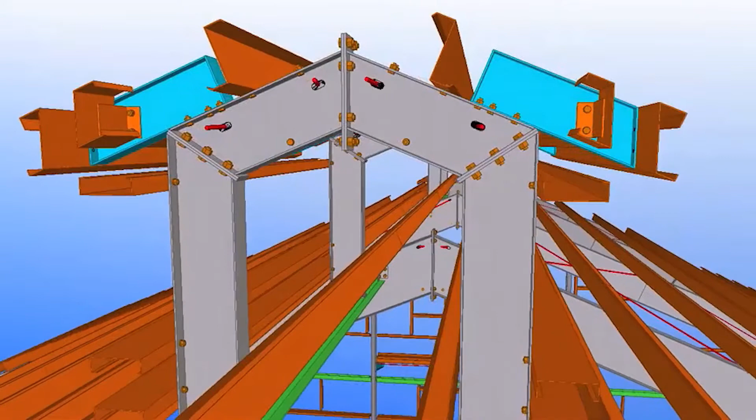All project data is accessed from the cloud, and the app uses technology that is already available on today's smart devices. Tekla 3D Building Information Modeling, or BIM, comes standard. All of this is possible because of our significant investment in BIM.

This investment helps move us into the digital age where stacks of paper drawings and 2D plans cluttering your desk are a thing of the past. Now your fully realized project fits right in the palm of your hand.

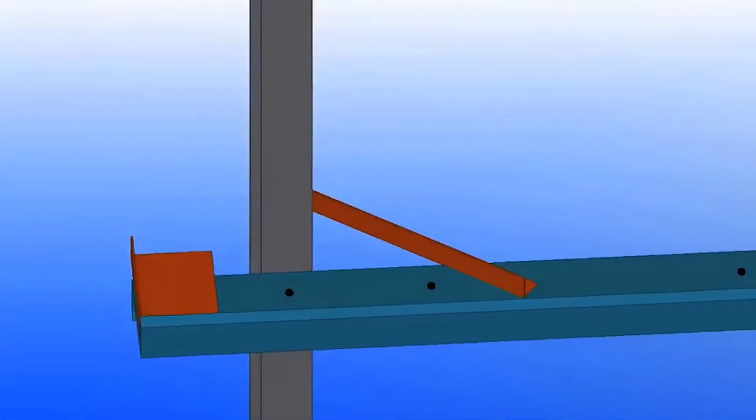This unique app was specifically developed to help builders and erectors save time unloading and staging steel at the job site. But perhaps the most important benefit of this revolutionary app is the enhanced efficiency of the shakeout and laydown process.

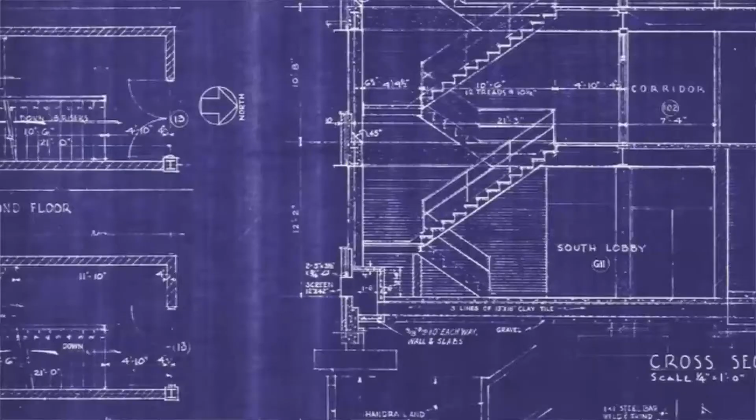Before ShakeoutPro, steel stagers would have to manually search through stacks of papers and drawings for the part marks they needed, then visualize which portion of the job site that drawing refers to before knowing where to move each piece of steel. And then they repeated that entire process for every single part mark. It was a lot of work.

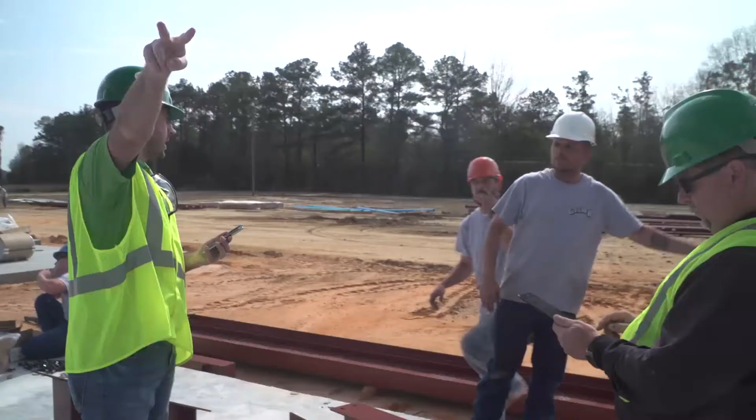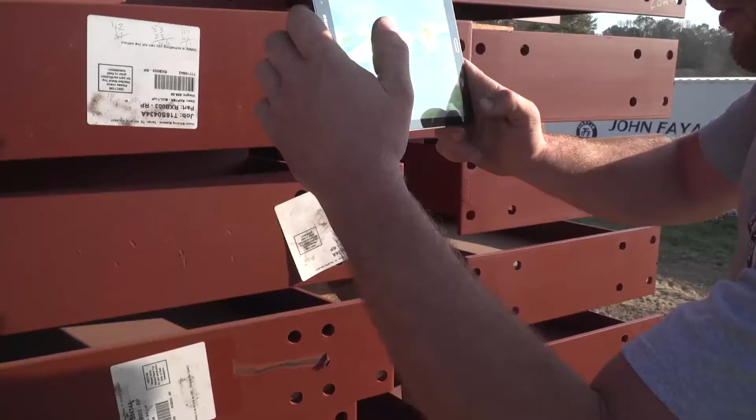As mentioned earlier, ShakeoutPro requires no special equipment or software. Just download the app to a smartphone or tablet that has a camera and an internet connection. Then, by simply scanning the barcode on any part, bundle, or crate, the app will digitally identify the appropriate parts and highlight them within the 3D model.

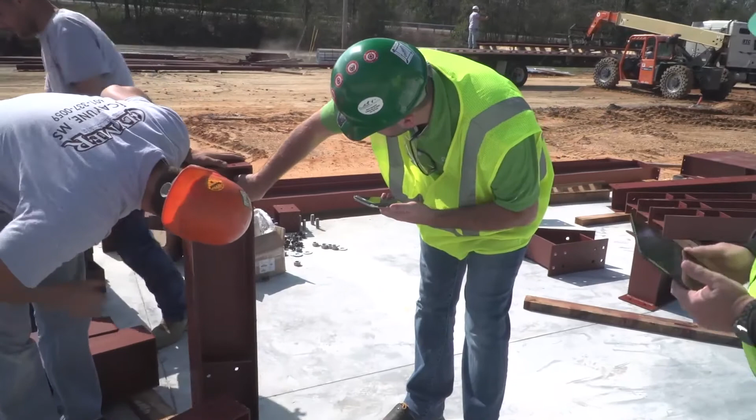It's not magic, it's the future of construction. And it's easy to use. When we introduced the app on test projects, field personnel were able to understand how to use ShakeoutPro in just a matter of minutes. In fact, many of the field workers who were familiar with even the traditional 2D method picked up a tablet and immediately began to move steel to the appropriate locations on the site.

To get started, just download the app to your iOS or Android device, type in the project number supplied by customer service, then tap the green Load My Project button on your screen. It's as simple as that.

ShakeoutPro controls at a glance. ShakeoutPro has an extensive set of features and controls that allow you to quickly shake out and stage with ease. And the intuitive design makes it remarkably easy to operate. Now let's take a closer look at these time-saving functions.

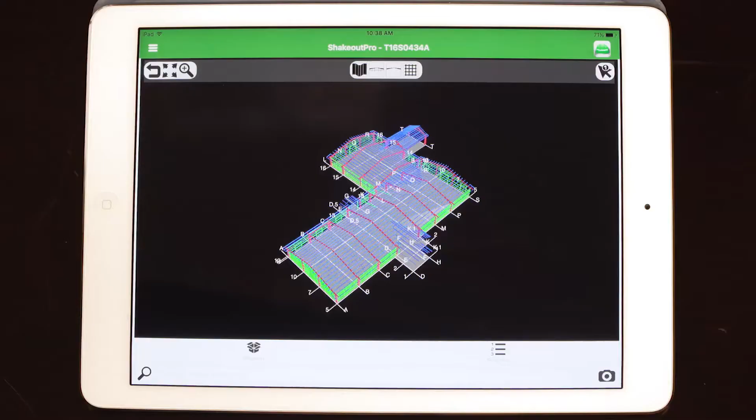Model View Gestures. You can change the way you view the model with a variety of simple finger movements. When a project loads, you are taken to the Model View screen from which you can view and navigate your project. With a single finger, you can pan left to right and vice versa.

With a two-finger slide, you can rotate the model view around the center of the screen. By using two fingers in a pinch or push motion, you can either zoom in or zoom out from the center of the screen.

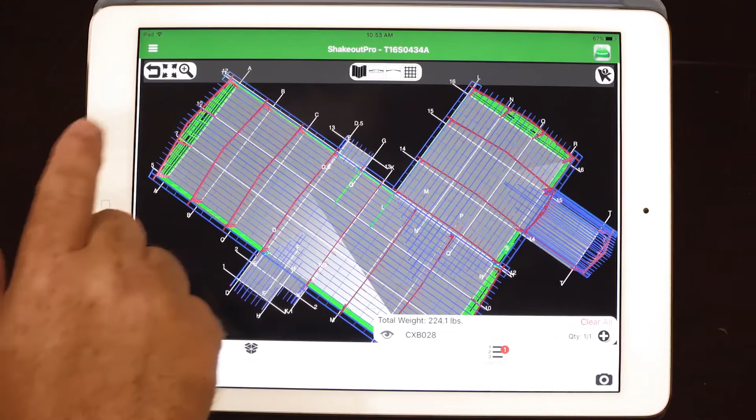View controls. View the model from the vantage point you want by simply tapping the appropriate icons. Want to go back to the original configuration? Just tap to return to the default zoom level and view angle. Tap to zoom out far enough to view the entire model, maintaining whichever angle you currently have. Tap to zoom in or out so that any selected part or parts will fit within the model view.

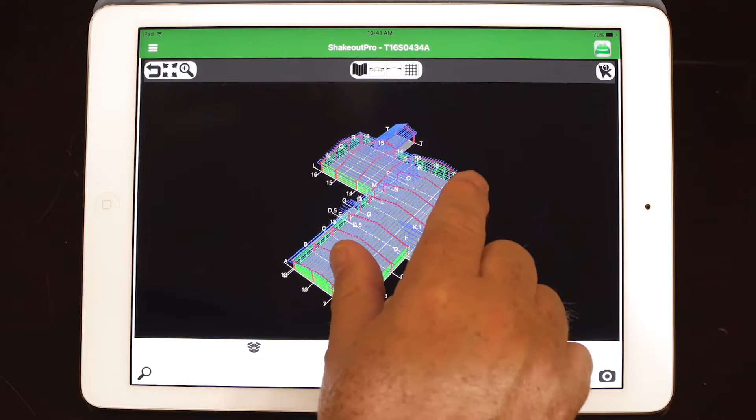Building grid lines. Quickly and easily determine where your parts need to be placed thanks to the building grid lines. Building grid lines are displayed as an overlay with the 3D building model, providing a method of orientation and direction on screen, just as they do on paper. These grid lines allow you to quickly orient yourself with the building layout and more easily identify where your parts need to be placed.

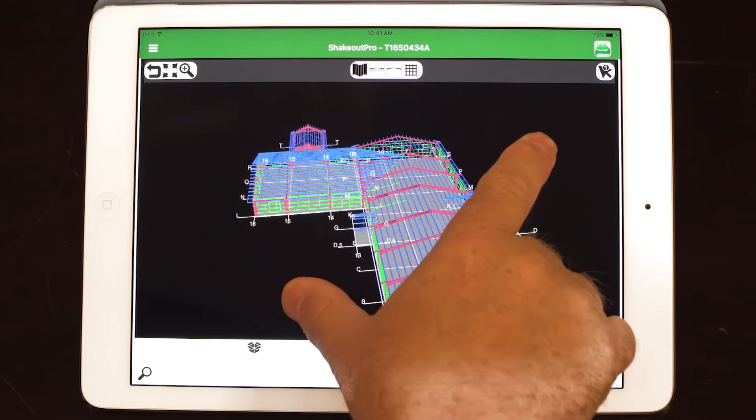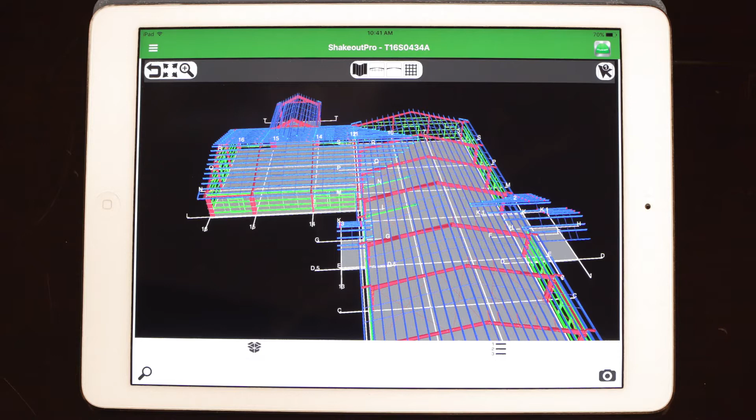When you scan a barcode on the physical column, it highlights the part so that you can see where it belongs on screen. But now you need to relay this location to your team. The grid lines allow you to call out a specific yet commonly understood location to your team. You'll be able to enjoy the benefits of this new age innovation while using the same language and terminology your team uses today. Grid lines can be turned on or off by simply tapping the grid line icon.

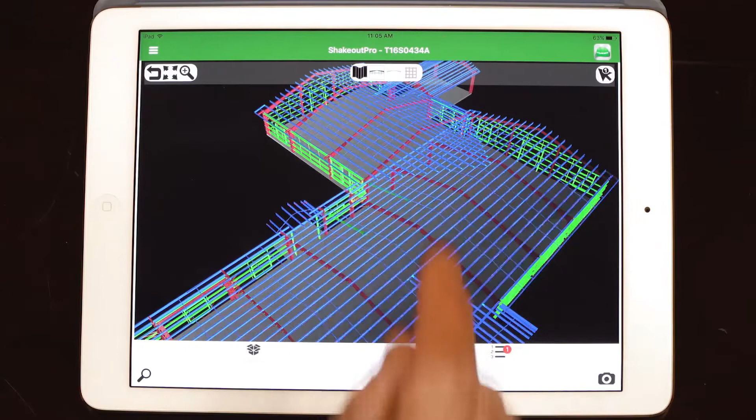Layer visibility controls. ShakeoutPro lets you control which layers you see. Just tap here to enable or disable visibility for all sheeting members in the model view. Tap to enable or disable visibility for all primary framing members in the model view. Tap to enable or disable visibility for all secondary framing members in the model view.

In selection mode, you can decide whether you want to select one part at a time or add multiple parts to a running list. To toggle between single and multi-selection modes, simply tap the slider control. In single mode, only one part can be selected at a time. But in multi-mode, the selected parts are added to a running list.

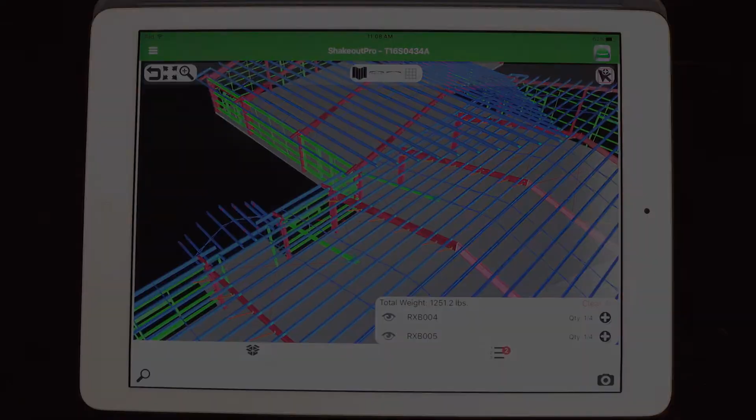Selection tray. When selecting parts, the selection tray performs a multitude of useful functions. A running weight total is shown for all parts displayed, which is helpful when it comes time to assemble sections on the ground that require a crane for lifting. Tapping the eye will turn on or off any parts associated with that line item, so you can see your project and weight total with and without certain parts in view.

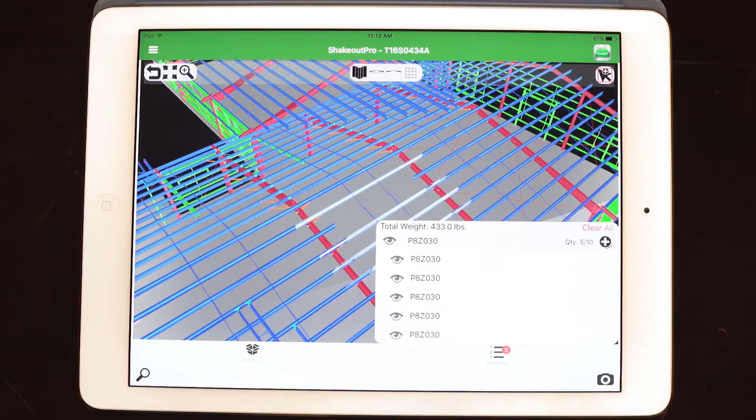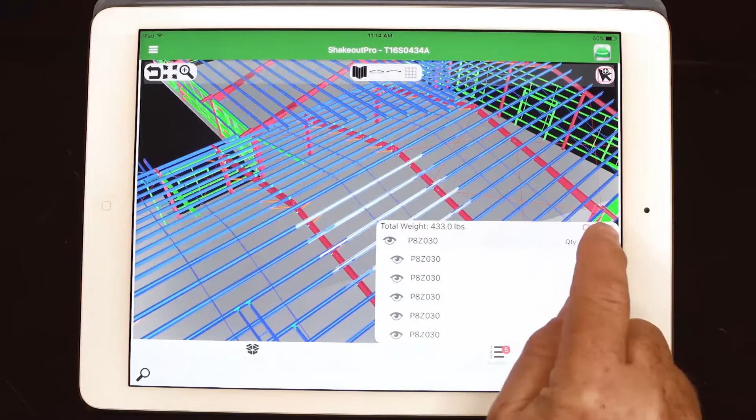Multiple instances of like parts will be grouped together, so just tap the topmost line item to see individual instances. Select individual instances to zoom in on those specific parts within the model. Tapping the plus sign will select all instances of that part within the model. Feel like starting over? Tap the red Clear All button to quickly remove all parts from your selection tray.

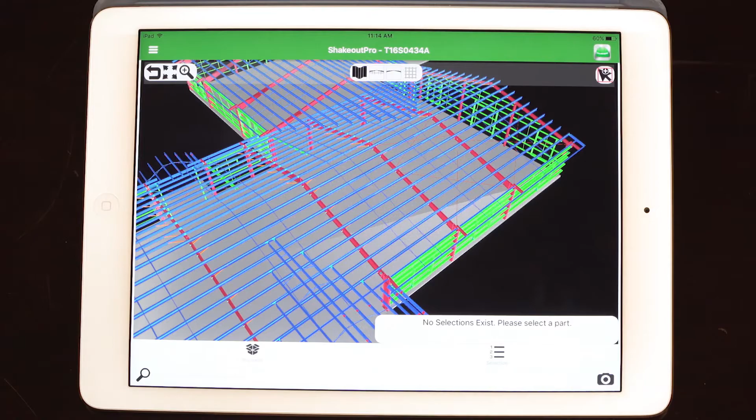Scan barcodes. Use your smart device's camera to find parts in a single click. To find a part, all you have to do is tap the camera button to the right of the entry field to activate scanner mode. Then you simply scan the barcode and it will tell you where the part is located. When scanning, be sure to focus the barcodes within the center box so it can get an accurate read. It will automatically exit scanner mode once the barcode is read.

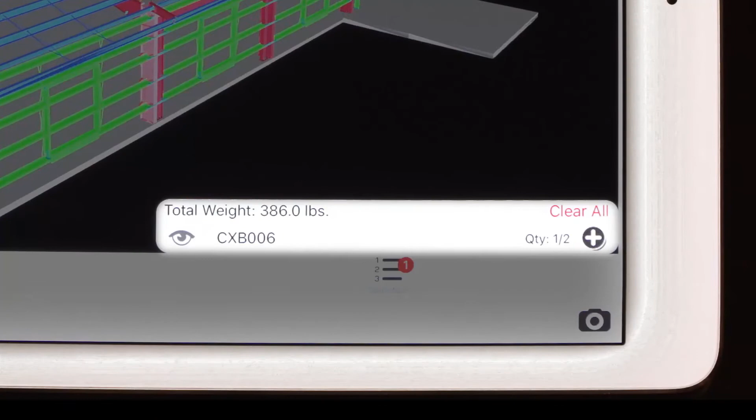If your selection tray was empty at the time you performed the scan, any successful results will be added to your selection tray automatically. If any parts were already selected at the time you perform a barcode scan, you'll be prompted to either replace your existing selection with whatever parts were identified by the barcode scan, or to simply add the newly scanned part to your running list.

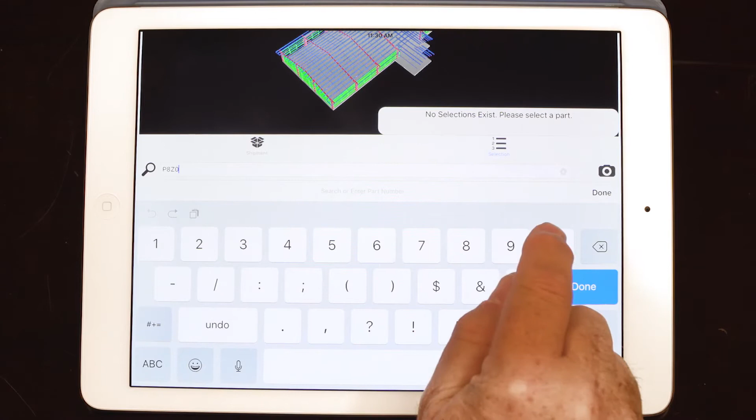Search model by part marks. You'll have the ability to find and select any part mark you want within the model. To search by part mark, just type the part mark in the search field at the bottom of the screen and all instances of that part mark will be selected. It's that easy.

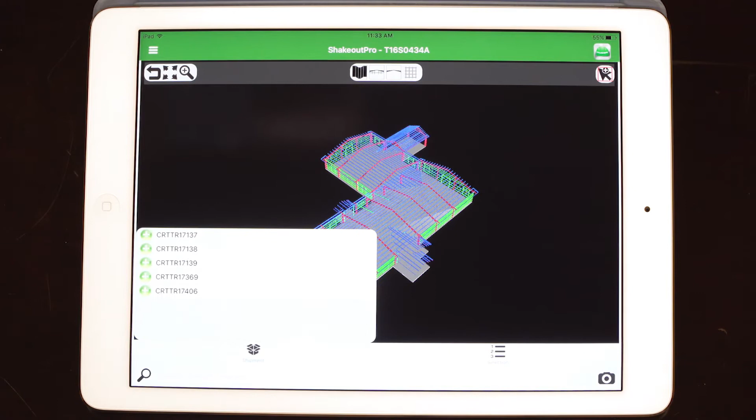Shipment tray. The shipment tray is a quick and convenient way to view the contents of a truck, crate, or bundle, much like a shipping manifest, only easier. When no parts are selected, the shipment tray will display all the trucks, bundles, crates, and parts for the entire project, or that specific phase of the project. When specific parts are selected, the shipment tray will show any truck, crate, or bundle from which the selected part originated. Tapping any parts in the shipment tray will select them within the model, add them to your selection tray and highlight them in the model.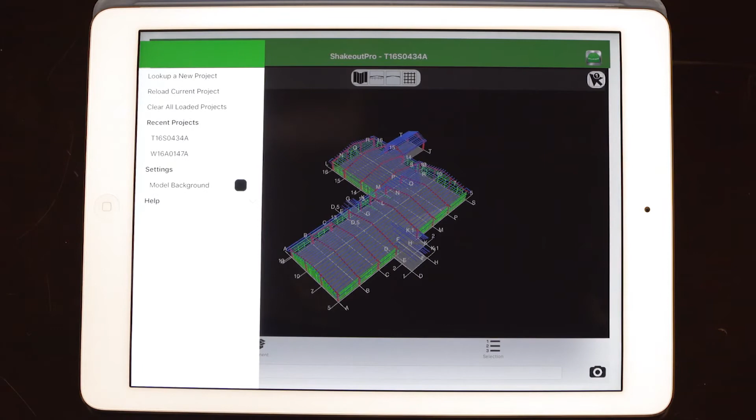Project menu. The project menu allows you to easily navigate the app and access a number of useful shortcuts. At any time, you can access the project menu by selecting the hamburger icon in the upper left corner of the screen. Within the project menu, there are a number of useful shortcuts. Select Look Up a New Project to return to the Project Lookup screen. By selecting Clear All Loaded Projects, you will clear all stored project data from your device's memory.

Recent Projects gives you easy access to projects you've been working on by showing up to 5 of the most recently accessed projects. Settings lets you choose between 3 different background colors depending on weather conditions. Help will launch a basic slideshow tutorial to help you easily navigate your way through the app.

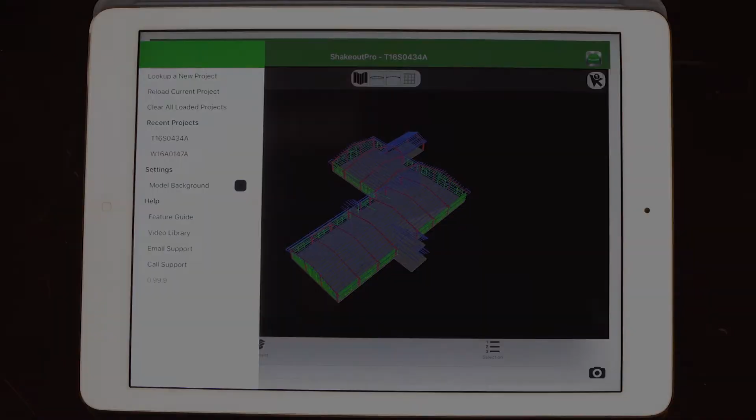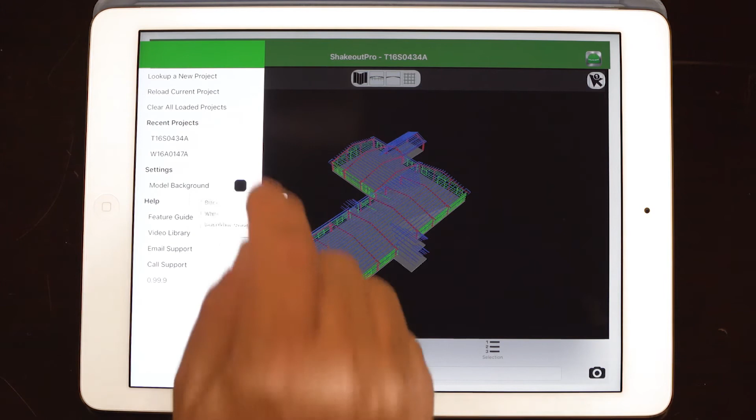Settings. The 3 background colors to choose from in Settings are black, white, and a blue gradient. Black is the default background, and it works best in low light conditions. The white background is most suited to bright site conditions, while the blue gradient background works well with all light conditions.

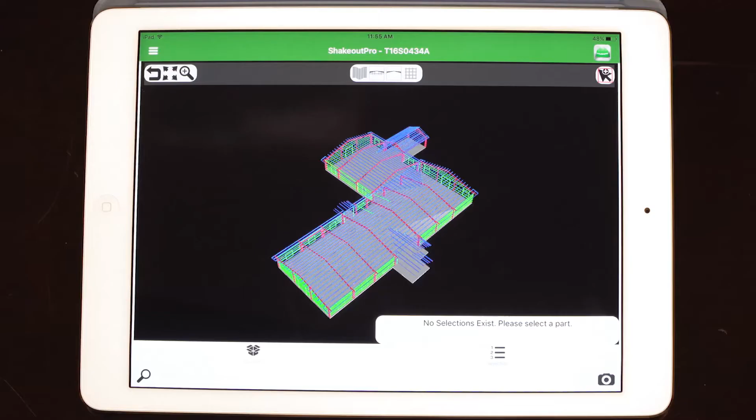Statusing. Statusing helps track your progress and communicate to others where you are in the project by assigning a status to parts in the model. If you swipe the top ribbon of controls off to one side, you will enter Status Mode. While in status mode, you can apply a status indicator to illustrate what progress has been made on the project. Tap the parts first, then tap the status to be applied. It's that simple.

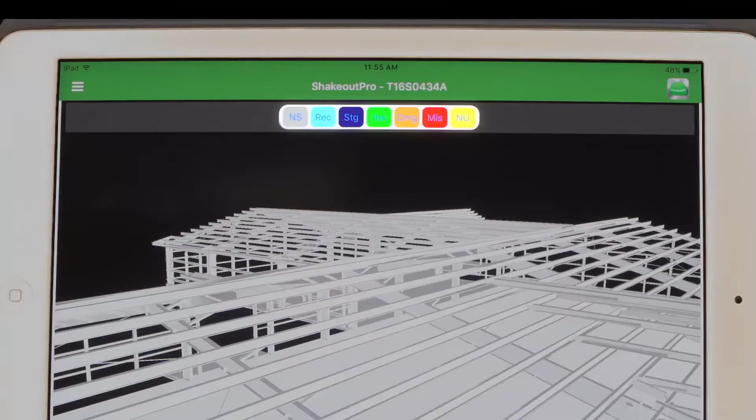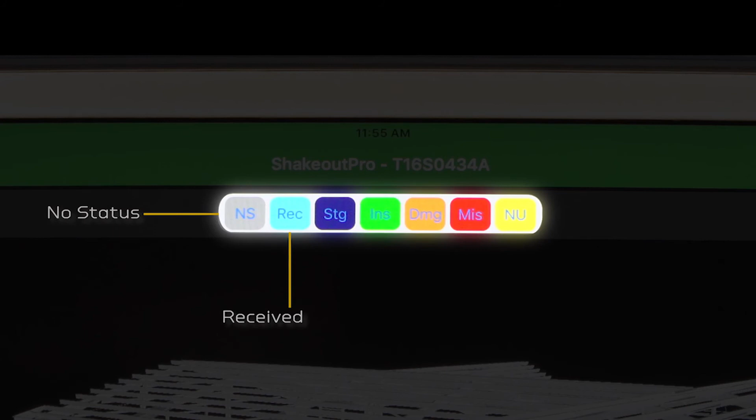Status categories. Now we're going to talk about the status categories and what they mean. NS means no status. By default, all objects initially come with no status applied to them. You can easily change their status as you go. REC stands for Received. STG means Staged. INS stands for Installed. DMG is short for Damaged. MIS stands for Missing. NU means Not Used.

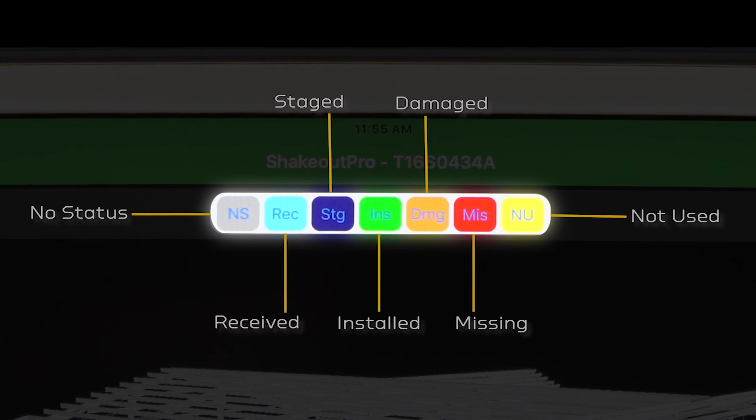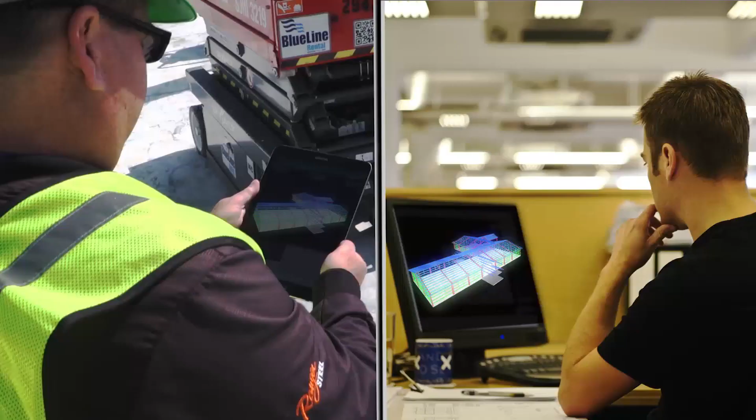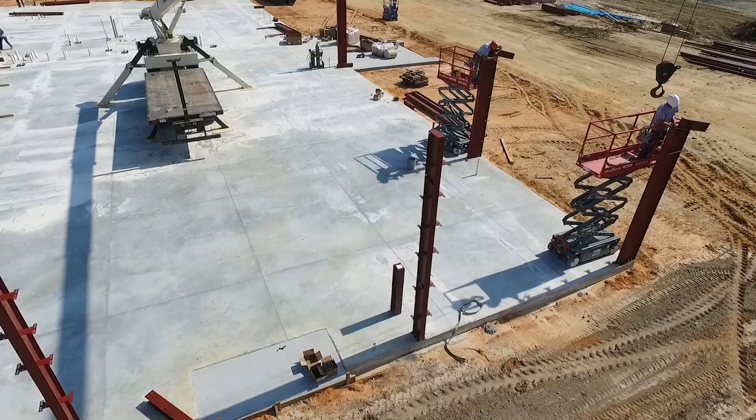When your device is connected to the internet, the status of your parts is automatically saved to the cloud every 30 seconds. When not connected, statuses are stored locally on your device and then saved to the cloud once an internet connection is established. Anyone who opens that same job number will be able to see the up-to-date statuses. But we do recommend that you designate only one person to be responsible for statusing on any particular project to avoid potential conflicts.